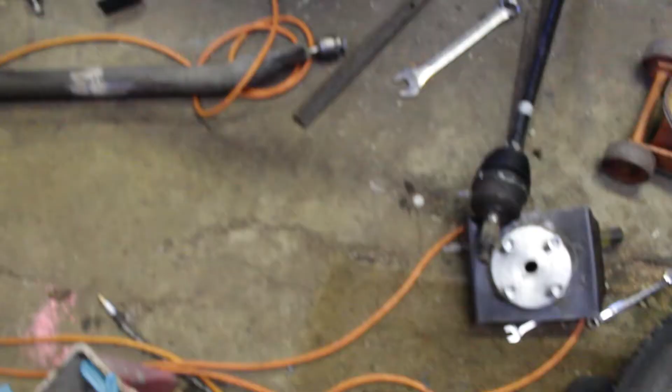What do you want to call them? Yep, this should be fun. So let's get at it. Okay, so as you see here, I've basically taken everything back apart.

This is one of the hubs here that I made, and I haven't modified this one. I did modify this one already. I haven't drilled it out, but you can see that this one has this tab on it still with just the one hole, which did not work having it like this. Had the 2 links back here, one up here.

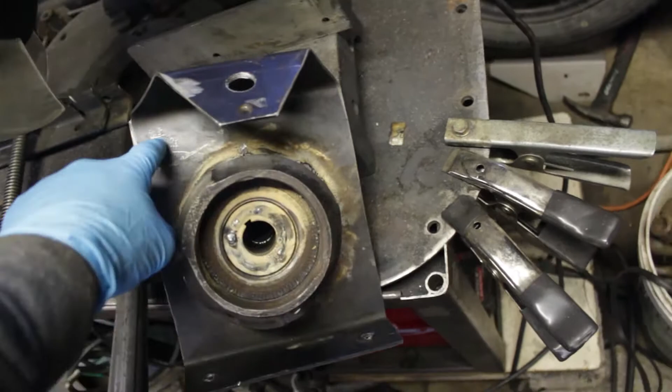It just wasn't right. I would have to add links in here, so instead of that I just basically welded on another piece of steel onto this, another angle, and I'll drill those out, and mount some stuff on that, and that'll be the 4-link, and then from the 4-link I will have a connection for this long one that connects into the 4-link somewhere.

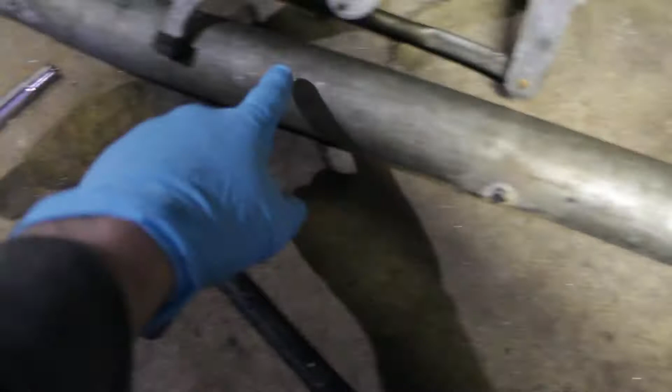Also, it'll probably connect right where the shock mount is. Honestly, I'm thinking that's where I'll put that connector, coming out right where the shock mount is, connecting to the shock. So I'll probably end up cutting these. I'm not going to need the whole length of it. I'm only going to need from like here to here or something, and then I'll have to squeeze it like I did here and find...

Some of these. We'll see how that goes. I know I got one laying around somewhere. I don't know if I have another one, but I know I got one. So, yeah, we'll see how it goes.

Other than that, yeah, it's coming along pretty good. The engine is just sitting in there still. I want to pull this out. I need to cut it and pull it out, take this bar out, because it's kind of in the way of stuff.

Yeah, it's kind of in the way of stuff. So we're going to go ahead and take that out too. Alright, so let's get at it.

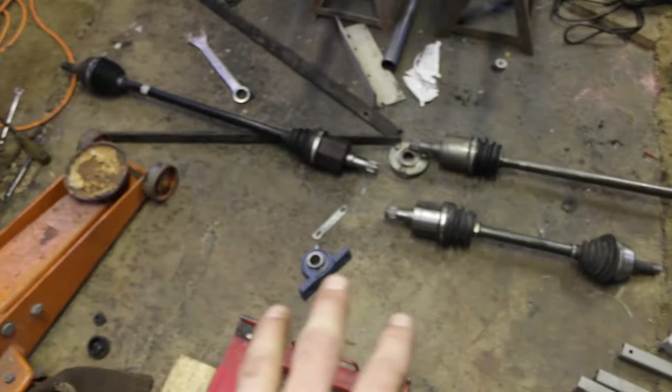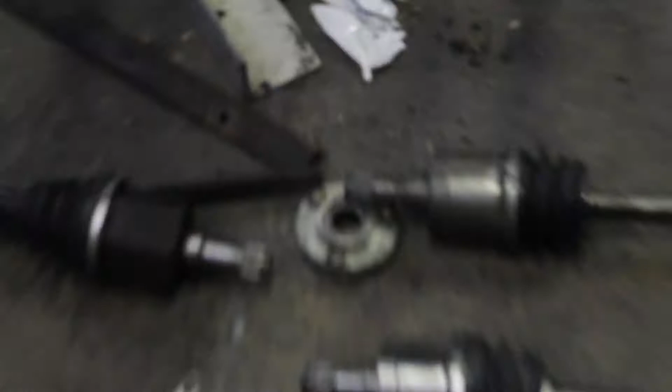Okay, so here's what I got figured out. In order for me to start rebuilding this new rear end, I need to build a box that's going to hang down, have 2 bearings on it, and it's going to have a place for those shafts to slide in and out of. There's one of the bearings right there, and there's a pillow block right there.

So those are the 2 bearings I'm going to use. This one here came out of the snowmobile. This one here my brother had on the shelf in one of these cabinets. They said I could use it. And they're both the same. So that's the cool thing, is they're both the same size, so they both fit over top of these shafts.

So I just need to figure out how wide this needs to be, so I can weld it together and then start building the 4-link, which is here. This is the redesign that I made.

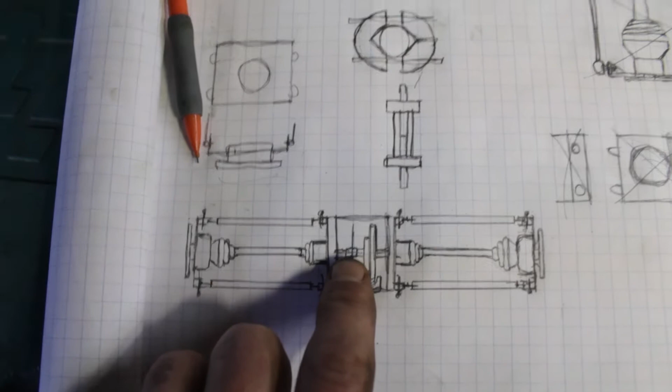Just look at it from the top. This here is actually a brake caliper, or a brake and a sprocket next to each other. But what I found is I may be able to put them a lot closer than I thought, depending on how big the sprocket is in comparison to the rotor and the caliper.

So yeah, I gotta look at that. So yeah, essentially it's just... you can see it really closely, but...

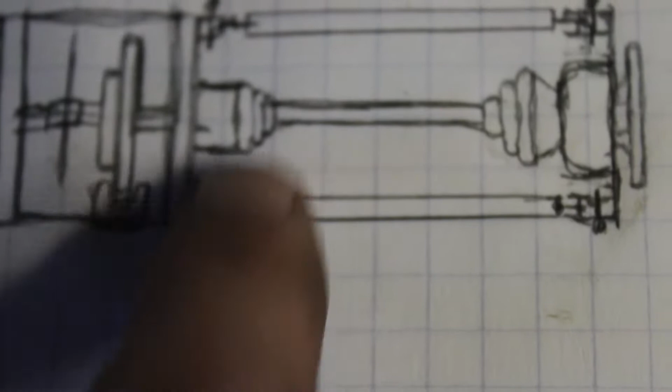Basically going to take some nuts and bolts and some pipe and make a bunch of eyelets for these areas here. All those areas are all going to need some nut and bolt made eyelets, then nut and bolts there. It's going to be a 4-link here, then the 5th link. It's not in this picture, but it's going to connect out here where the shock is.

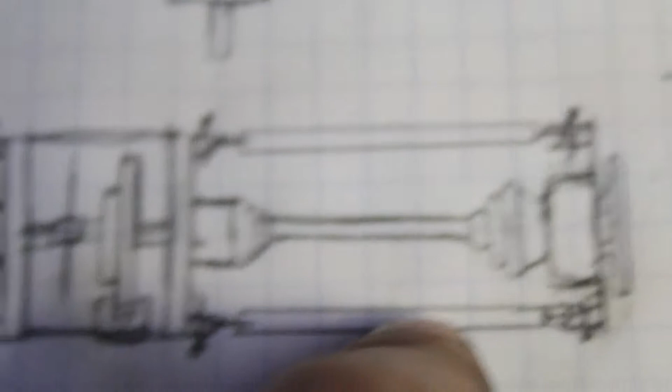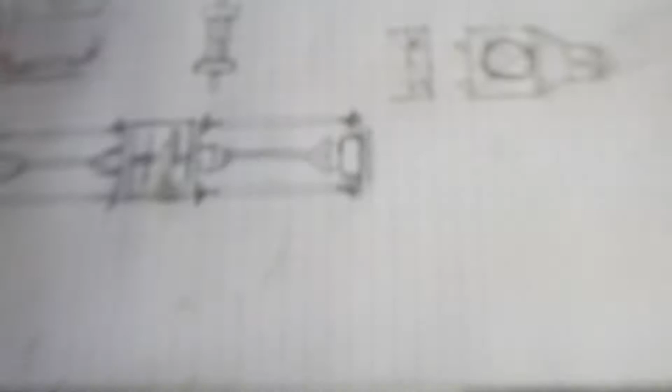So I have this over here. These are parts for my brother's dirt bike. There's a brand new sprocket, a 52 sprocket that he's putting on, and I'm gonna get the old one, which it's not that bad, nothing, you know. So we shouldn't have any problem handling the 30 horsepower.

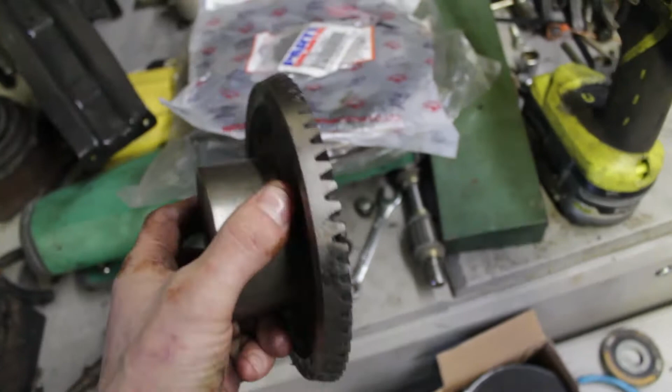Maybe a lightweight. So basically, what I've got to do is use this piece here to make an adapter out of this other piece. This came out of a big chunk of machinery I tore apart - you'll probably see that video, some cool stuff came out of it. But this big huge gear, I'm going to turn it down in the lathe so it's thinner here.

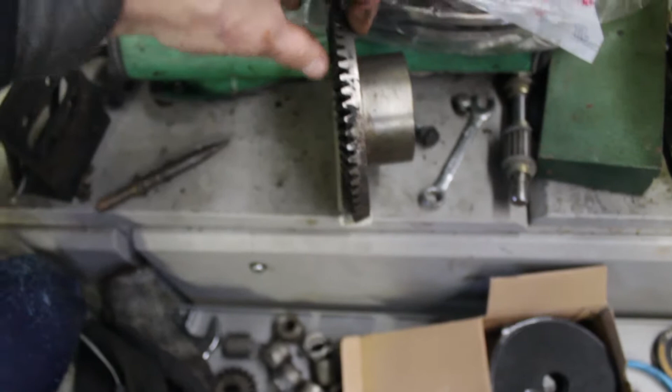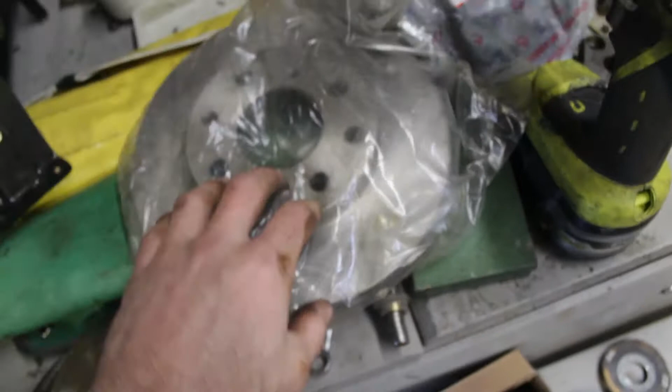Make it a little thinner here, cut that back so it's flat, and I could drill holes through it to match this sprocket. Then I'll lathe this down just a bit to thin it out so I can fit this rotor over top of it - the rotor will slide over that side and fit into it. Then I'll weld the old rotor that comes off a Honda onto this to make the rotor and an adapter for the sprocket.

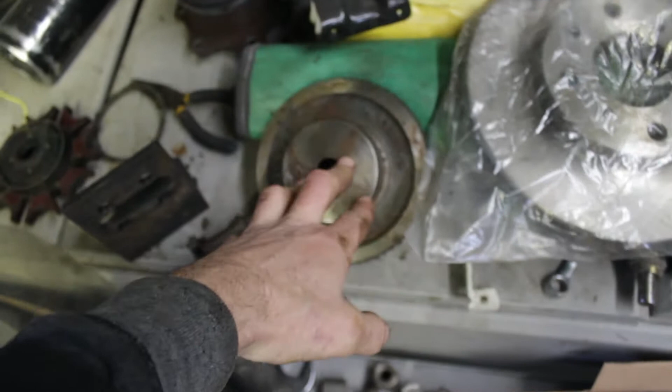This will be like the main hub for the drive and brake assembly, all in one. It'll have to get welded up really nice, but I can lathe this out to the size of the pipe I already lathed earlier.

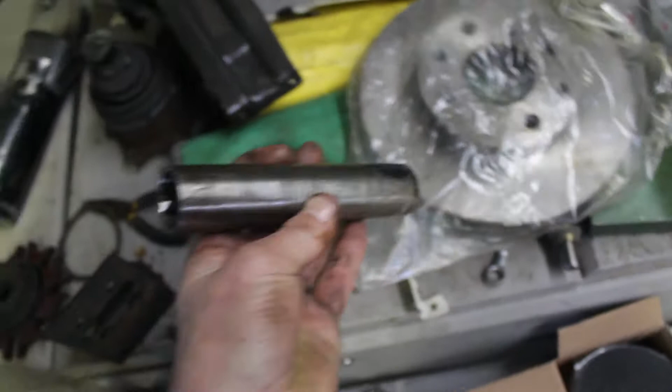Now this pipe here, I put on the lathe and rounded it so it fits over both of these axle splines. Fits over this one - each one is special - and it just kind of snaps in really good. So it fits over that one, and this side fits over this side.

Basically what I'm going to do is once I get that adapter plate able to slide on this, I'll put the bearings on, slide this on, drill a hole through here and through this axle so I can put a pin through to lock these axles in - maybe a hardened steel pin. If that doesn't work I'll just weld it, and if I need to get it off, I'll grind it.

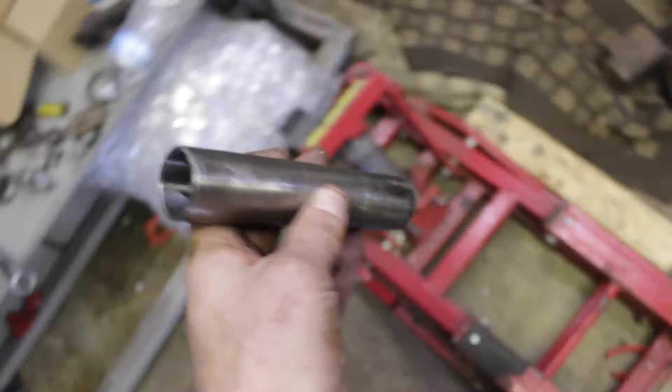This one here I did on the lathe last night - didn't really film it, didn't take that long. But this is an axle shaft from an Audi CV axle shaft, so it's like a torque tube - pretty strong, like hardened steel. It should handle a lot of torque.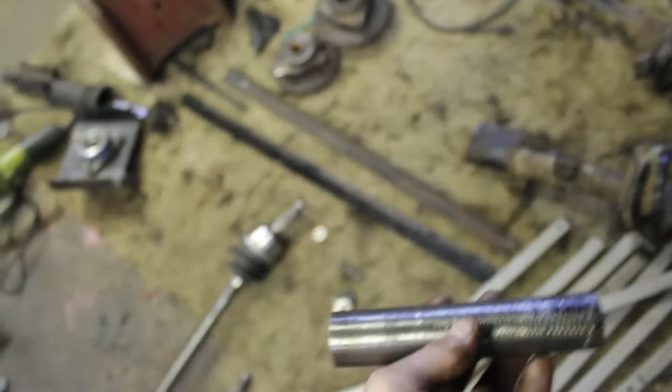I didn't have to lathe out the inside very much, just cleaned the outside off. It was very hard to do. There's the other piece of it, I'll show you.

So essentially this is what it came off of - this thing, and the other one. It was already hollow on the inside, which surprised me - thin walled already. This car had like 300 horsepower that came off it, so I'd hope this piece could handle 30 horsepower.

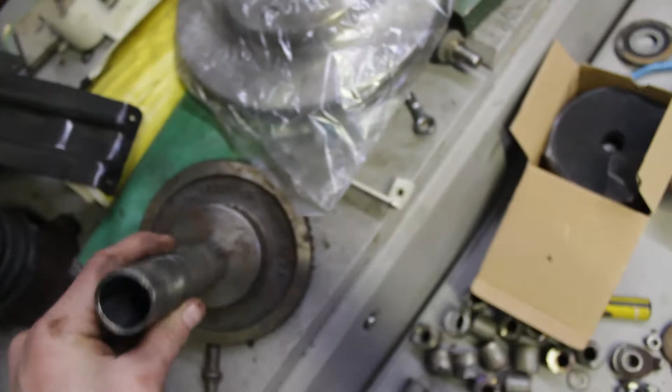So I'm just going to lathe it to fit over top of that, so it slides over this, and then I'll be able to weld this and change out any sprocket I want - although the rotor would never get changed out, ever, because it'll get welded on. But whatever, it's fine, it should last a long time. If it doesn't, I'll cut the welds off and redo it.

So yeah, let's get to milling this down, taking it out of the lathe, and figuring out if we can make it all work. Hopefully it does, and we'll see this come together real quick. All right, let's get to it.

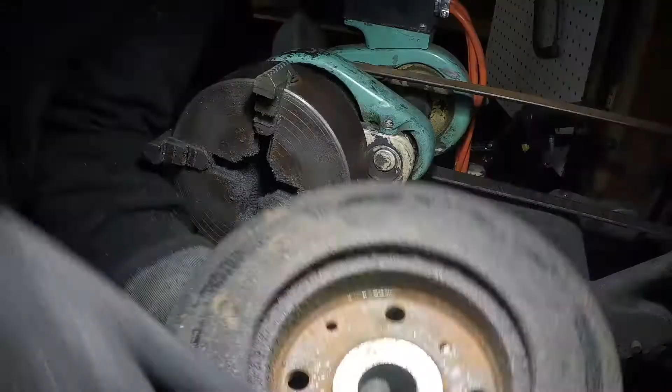Now I've got to drill out the holes for the sprocket adapter side. Once those are drilled out, we can check to see if it fits - hopefully it does, that'd be really cool, and everything works good just how it's supposed to. Use a little bit of oil here.

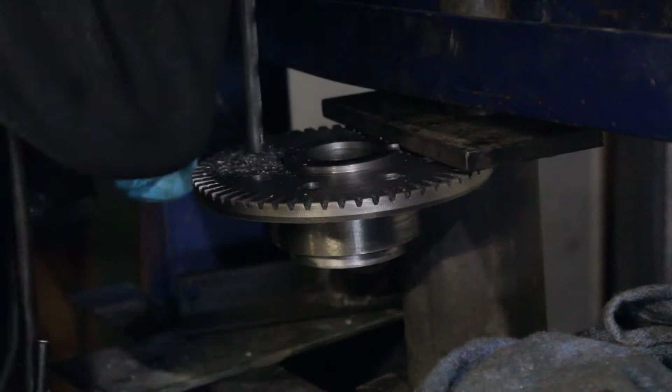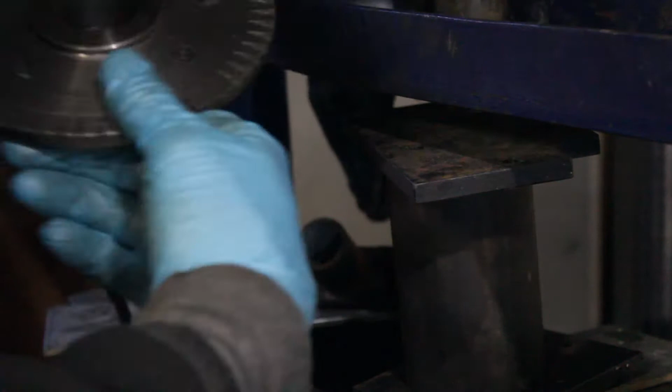So we'll move it, tap the next two holes, drill our pilots, and then drill our actual hole. I already hit these with a punch to designate the holes - 1, 2, 3. These all match up a certain way. It's actually for two different bolt patterns, but hopefully they're for that dirt bike sprocket - if it goes on that dirt bike, it should work.

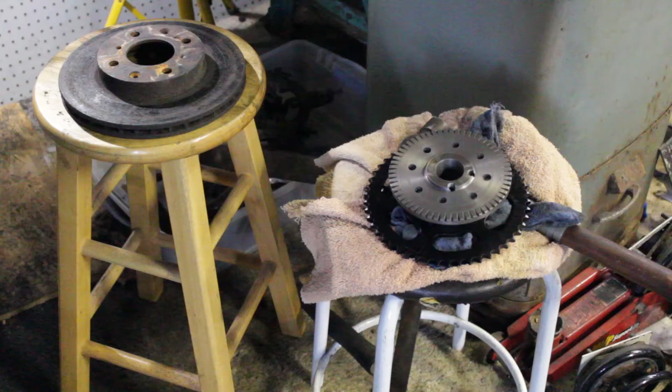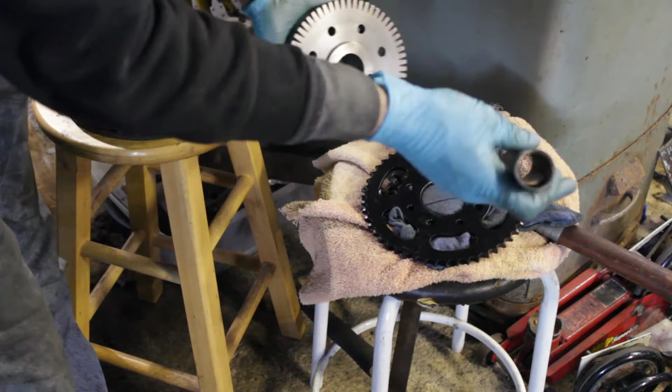All right, well this is the sprocket adapter piece I made for the axle. Here's the axle piece where those two drive shafts go in - this slides through here like that. I'm going to put a bushing inside of there, that's why it's a little shaky, but this side's nice and tight. This sprocket goes right on there, lines up with the holes.

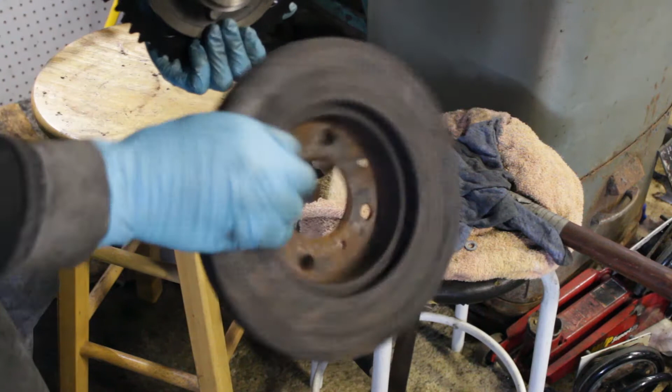Alright, so there's that, nice and smooth. Now what I'll do with this is the one I'll be using - I cut that out so it just slips right on there, you can see right through the back here. I'm going to weld that up really nice so it'll be solidly connected to this hub. It'll look just like that.

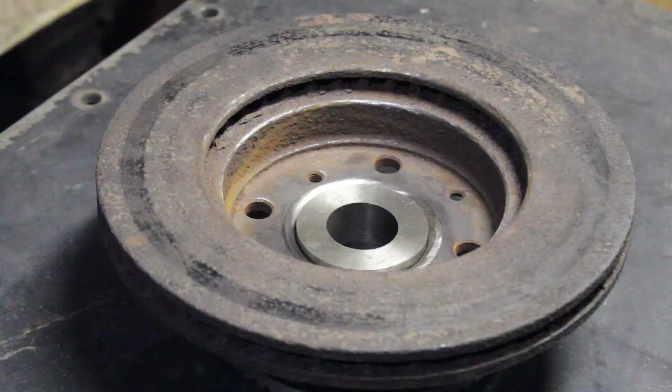Alright, so here is our adapter we made, here's our rotor - slips right on there, nice and tight. Alright, I'm gonna grab the welding mask, turn the welder on, and give her a good weld. Gonna do it in quadrants though.

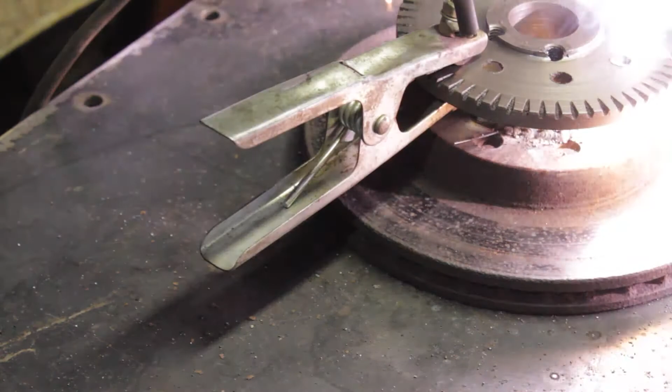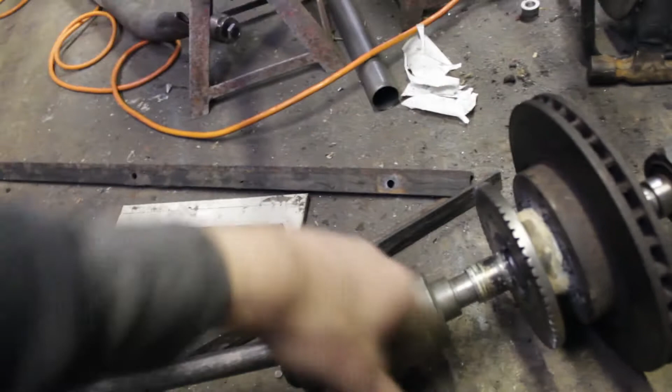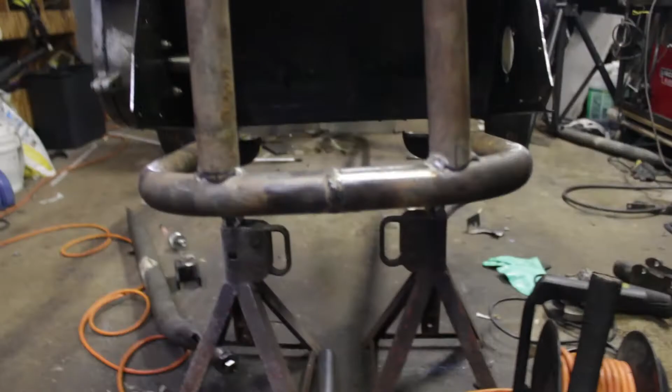That's it, all right everybody. So it took all day, but we got that part made. This is the rear caliper and sprocket mount - a universal sprocket mount that I had to lay out and make fit and work. Now this whole rear axle assembly should take bearings there and there, go up there, and be freaking awesome.